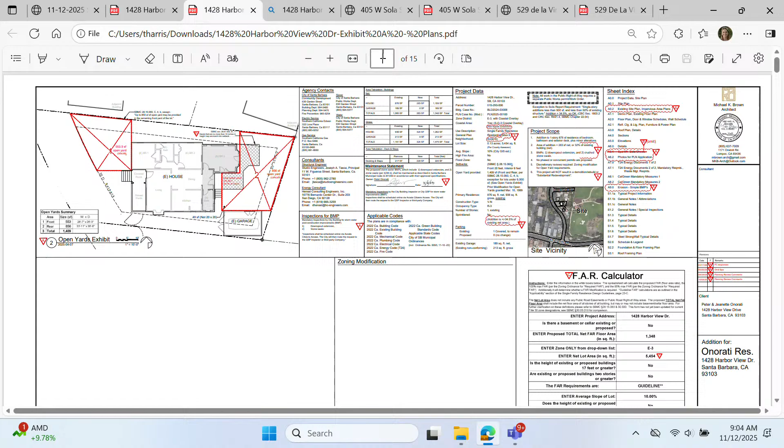The proposed site plan shows the project involves a 289 square foot one-story addition and a 220 square foot exterior deck, located in the rear, in the shaded area - the addition is shaded, and the deck is right here. The proposed addition would eliminate the existing conforming open yard, as it would reduce the yard's dimensions below the required minimum, which is 20 by 20 feet. Therefore, the applicant is requesting an open yard modification to allow the reduction in conforming open yard area.

For some background on open yard areas, they are intended to promote desirable living conditions, provide a sense of openness in residential developments, and ensure adequate space for outdoor living and recreation. For lots under 6,000 square feet with a slope of less than 20%, like this lot, the requirement is 1,250 square feet of open yard, and it may be provided in one or multiple areas. Up to 850 square feet of open yard may be provided in the remaining front yard.

Also, each open yard area must be at least 20 by 20 feet measured perpendicularly. And then I'm going to show the proposed open yard so we can see it better.

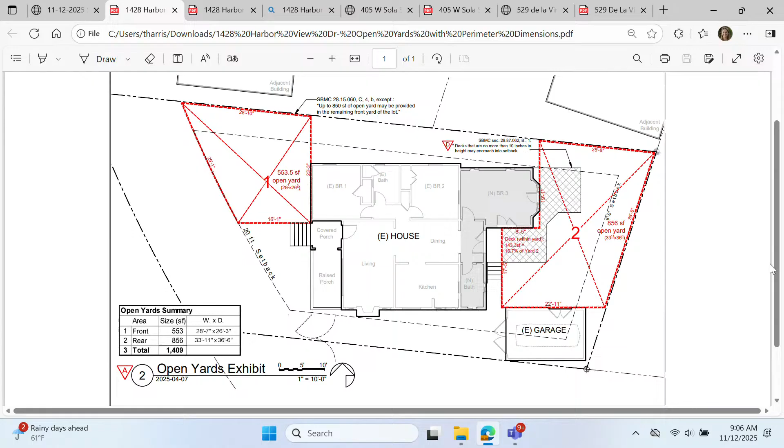So the project design continues to provide 1,250 square feet of usable open yard area. However, as I said, due to the addition and the lot's irregular shape, the dimensions of the open yard area will be less than the required minimum 20 by 20 feet. The proposed dimensions measure at least 17 feet in length in the rear yard and 16 feet in the front yard. You can kind of see these lengths and dimensions, and how the lot is irregularly shaped.

Because the project still offers 1,250 square feet of usable open yard area, staff supports the requested modification. However, staff recommends including the condition of approval requiring that 850 square feet of open yard will be located in the rear of the property and 400 square feet will be located in the front yard outside the setback. These areas shall be dimensioned and clearly designated on the plans at the time of building permit submittal.

With the recommended condition, staff believes that the required findings for the open yard modification can be made, specifically that it's consistent with the general purposes of the zoning district in which the property is located. It prevents unreasonable hardship due to the lot's irregular configuration, which limits the open yard areas. And although the project's 1,250 square feet of functional open yard does not meet the required minimum dimensions, which are at least 20 by 20 feet, it provides adequate outdoor space consistent with the intent of the open yard requirements.

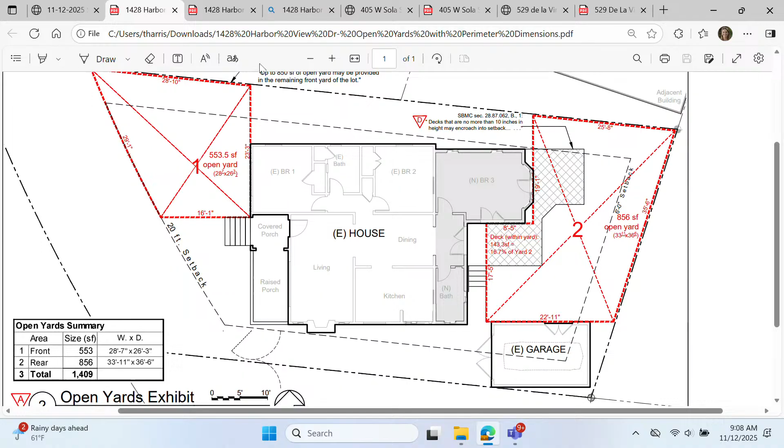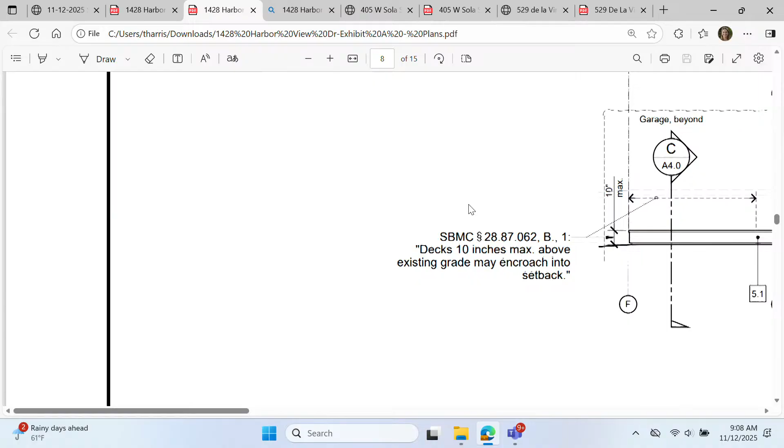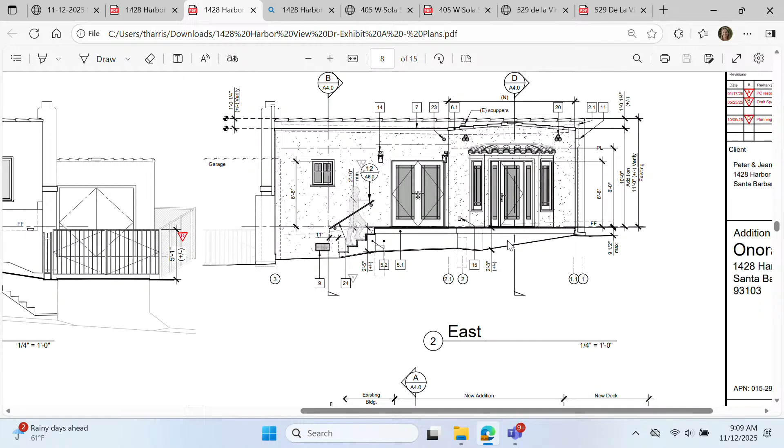And I am here for any questions. Also, the applicant, Michael Brown, is here, as well as the owners.

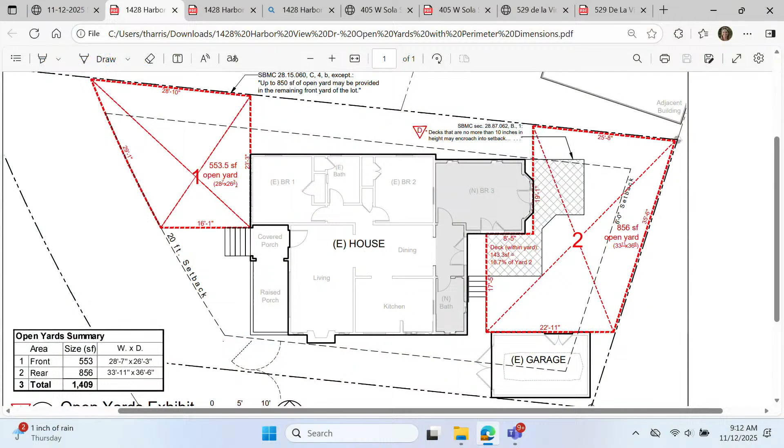Yeah, so in 1999, the staff hearing officer approved an addition that was similar to this addition but smaller, and they also got an open yard modification at that time. However, the building permit was issued and work commenced.

However, the addition was never built, so that deck is as-built because there were no inspections, and it wasn't an addition. That's the background, which gives us some grounds for support because at some point an open yard modification was granted, so that helped with staff support.

Great, thank you. And the as-built deck, was that constructed where the additions are going to be located? Is that correct? Yes, I believe so. I think the deck is actually on a foundation, is that correct? Yeah, it's basically the same footprint as the bedroom. Almost exactly.

Okay, great. And then, Ms. Fennessy, does this project require a design review at all? It does not. Okay, great.

Those are all of my questions. I have one additional question for the applicant. I just wanted to make sure the applicant had seen the condition of approval recommended by staff, requiring the 850 square feet of open yard located in the rear and 400 square feet in the front. I know you've already dimensioned the plans to show that, but just wanted to make sure that's clear for the record. We're aware, yes. We exceeded as well. Yes, great.

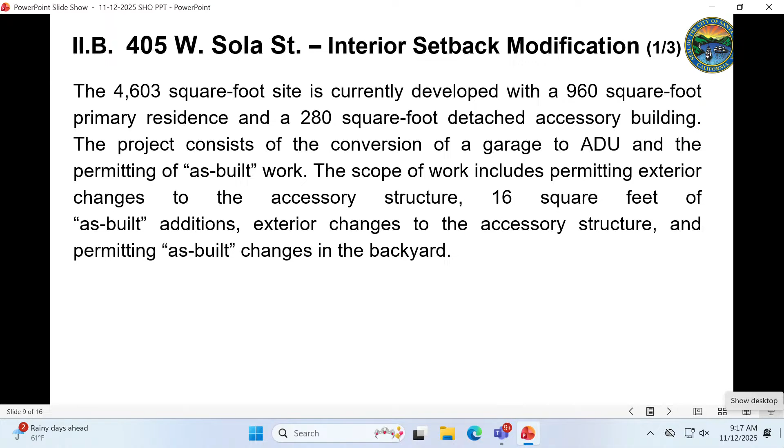So the 4,603 square foot site is currently developed with a 960 square foot primary residence and a 280 square foot detached accessory building. The project consists of the conversion of a garage to an accessory dwelling unit and the permitting of as-built work. The scope of work includes permitting exterior changes to the accessory structure, 16 square feet of as-built additions, exterior changes to the accessory structure, and permitting as-built changes in the backyard. The discretionary application required at this hearing under the purview of the Staff Hearing Officer is an interior setback modification to allow as-built additions of a proposed ADU to encroach into the interior setback.

The project is exempt from further environmental review under Section 15303, the new construction or conversion of small structures exemption of CEQA. No significant project-specific or cumulative environmental impacts are expected because of the project. The project does not have the potential to damage scenic highways or historic resources. The project is not identified as a hazardous waste site, and those categorical exceptions do not apply.

So with that, I will go ahead and turn it over to Mr. Stolberg to provide the staff presentation.

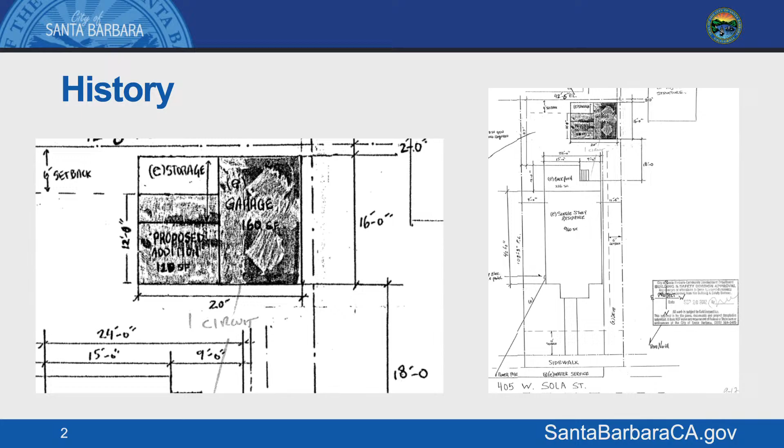In addition, the side of the garage was located outside of the setbacks and was permitted as well. On the left side of the screen, where you can see what is labeled as e-storage, that is where the additions being reviewed today are located.

Here you can see the accessory structure in question on the eastern side of the site. Two unpermitted additions to the accessory structure have been constructed, which encroach upon the interior setback.

The applicant wants to convert this accessory structure, currently classified as a garage, into an ADU, but first needs to receive the interior setback modifications to allow this encroachment and allow the permitting of the ADU.

This project was previously reviewed by the Single Family Design Board at the consent level once already. SFDB stated that the board is in support of the project, which provides additional housing, and that the size and scale of the project is reasonable and not visible from the street or for neighbors.

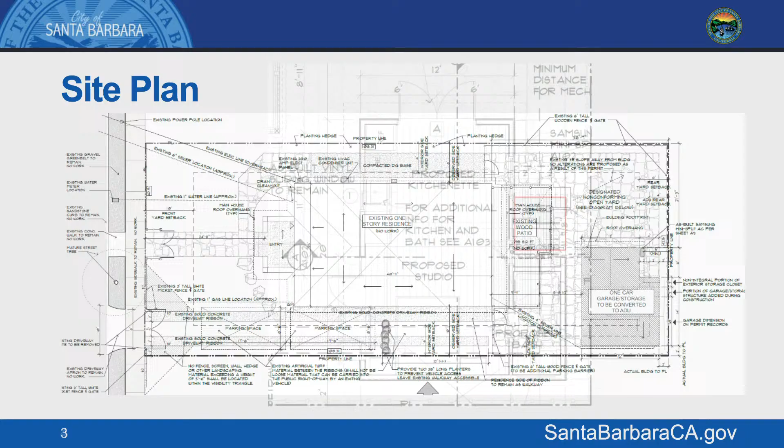In the RMH zone, accessory structures have a setback requirement of 6 feet, but for ADUs it's 4 feet. The dashed line that bisects the red box shows the 4-foot setback. So in total for these additions, it's only 8 square feet of space, which encroaches upon that 4-foot setback.

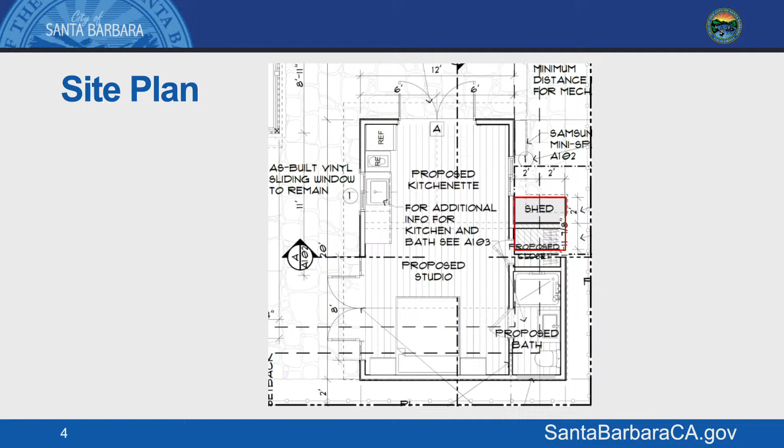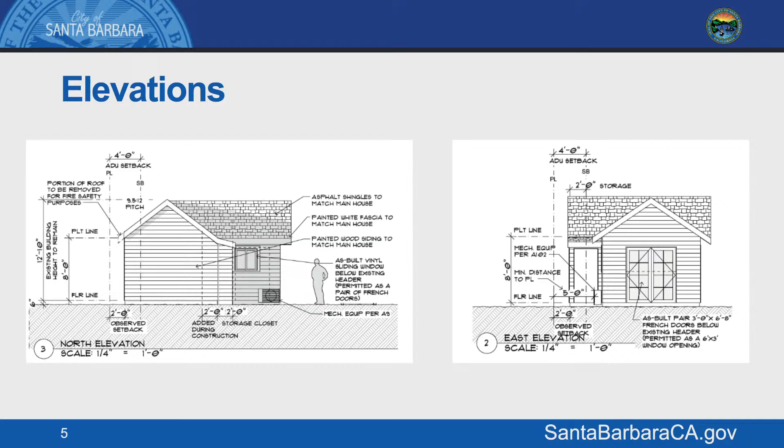Here we have the two elevations, the north and the east, where you're able to see the addition. On the left, the north elevation, the addition is indicated by the dashed line towards the center of the structure. On the right, you're able to see the front or access door for the shed on the outside of the structure. Both of these additions were built with the same styling as the accessory structure and the primary structure as well.

Because of this, the interior setback modification is consistent with the general purposes of the RMH zone and is necessary to secure an appropriate improvement on the lot for the ADU. Staff recommends that the staff hearing officer approve the interior setback modification, making the findings in the staff report.

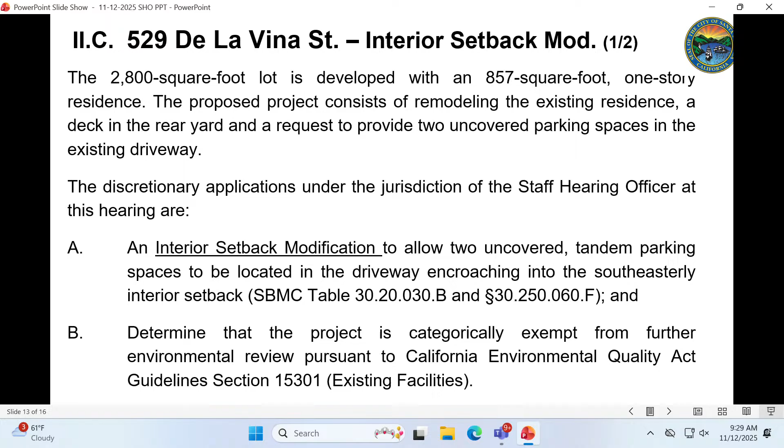The proposed project consists of remodeling the existing residence, a deck in the rear yard, and a request to provide 2 uncovered parking spaces in the existing driveway. The discretionary applications under the jurisdiction of the staff hearing officer at this hearing are an interior setback modification to allow 2 uncovered tandem parking spaces to be located in the driveway, encroaching into the southeasterly interior setback, and to determine that the project is categorically exempt from further environmental review pursuant to CEQA Section 15301, which is for existing facilities. Section 15301 allows repair, maintenance, and minor alterations to existing public or private structures. So with that, I'll turn it over to Ms. Brodesson.

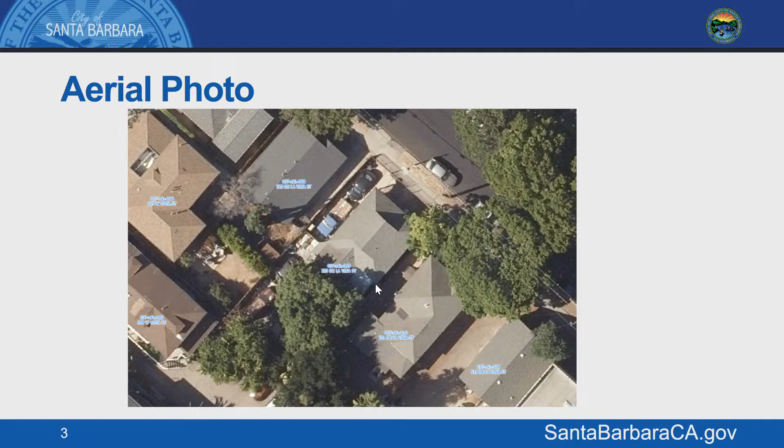The parking requirement for single-family residences in this zone, the RM zone, is 2 covered spaces. The subject property was non-conforming to parking, with a 1-car carport located in the southeast rear corner of the property. City records show that at some point the carport was demolished on site and parking was not replaced.

Required parking cannot be removed without replacing it somewhere on site. However, the driveway remains on the project site. Effective January 1st, 2023, Assembly Bill 2097 was approved, exempting residential properties from parking requirements if they're within 1/2 mile of a defined public transit stop, which this project site is, being within 1/2 mile of the bus station and the Greyhound or train station.

However, the municipal code also says that any driveways shall serve approved parking areas or loading areas, and if no replacement parking is proposed on site, the driveway is no longer necessary to serve parking, and therefore the paving and the driveway curb cut should all be removed.

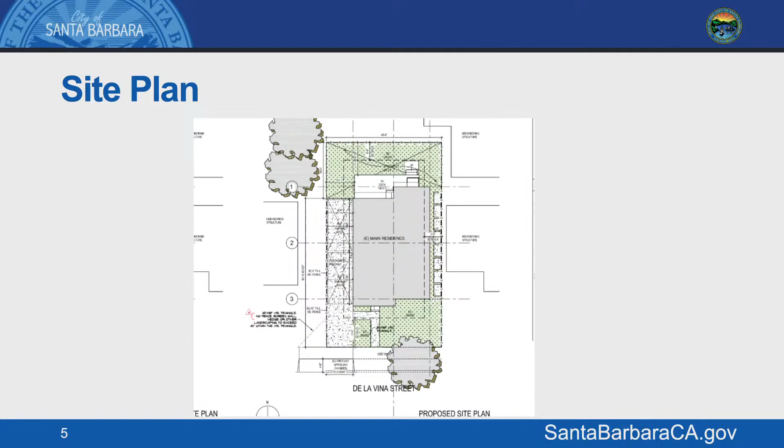So what we're looking at here in terms of scope of work is the modification for these 2 parking spaces and the windows to be replaced, as well as the rear deck, which has been allowed within the open yard considerations.

Great, thank you very much. So a couple questions, Ms. Brodesson: for the replacement of the windows like for like, is there a need for any additional items under the staff hearing officer for that replacement, or will that be done at the staff level? Same with the rear deck.

Thank you, Ms. Harris. No, this project would have been exempt from design review except for the fact that it is not conforming to the setback, and changing a window in the setback requires a minor zoning exception. So that is reviewed by the design review board, and that has already received positive comments.

And I wanted to ask the applicant: what was the applicant's preference, just given that you are in AB 2097? Was it the preference to maintain these spaces on the site, and that's why the request is here, or was there a preference to not have parking on the site at all?

Thank you. The preference was to actually have the option to provide off-street parking. It's difficult to park in that neighborhood, so that was our preference, yes. So this project would then help with that.